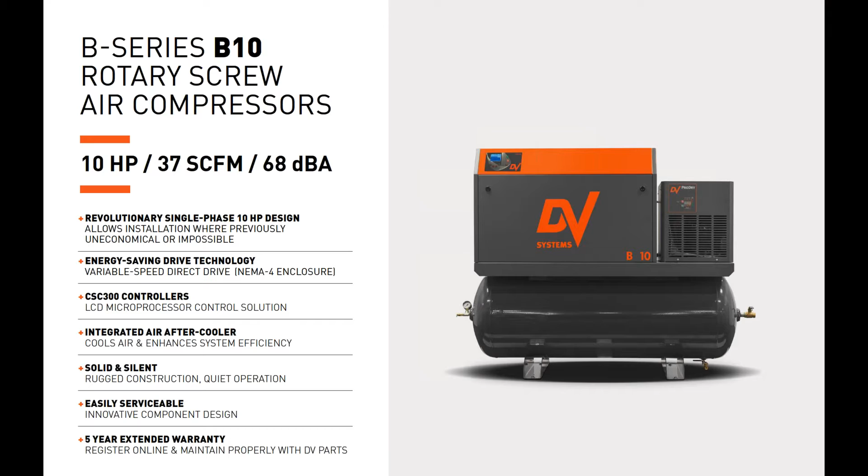So the B series B10 rotary screw air compressor, it's a 10 horsepower air compressor. It delivers 37 SCFM of air, and it does this quite quietly, clocking in at 68 decibels. Its first unique feature is its revolutionary single-phase 10 horsepower design. This allows installation in locations where it was previously uneconomical or impossible.

It also features the energy-saving variable speed direct drive technology. This comes with a NEMA 4 enclosure. It also features the CSC300 Advanced LCD Microprocessor Control solution. It features the integrated air aftercooler, which effectively cools air and enhances system efficiency. It features a solid and silent, rugged construction and quiet operation design. The B10 is easily serviceable with innovative component design.

And like all of our rotary screw air compressors, it features a 5-year extended warranty. All you have to do is register the product online within 30 days of purchase, maintain it properly according to the service manual, and use only official DV Systems parts and kits.

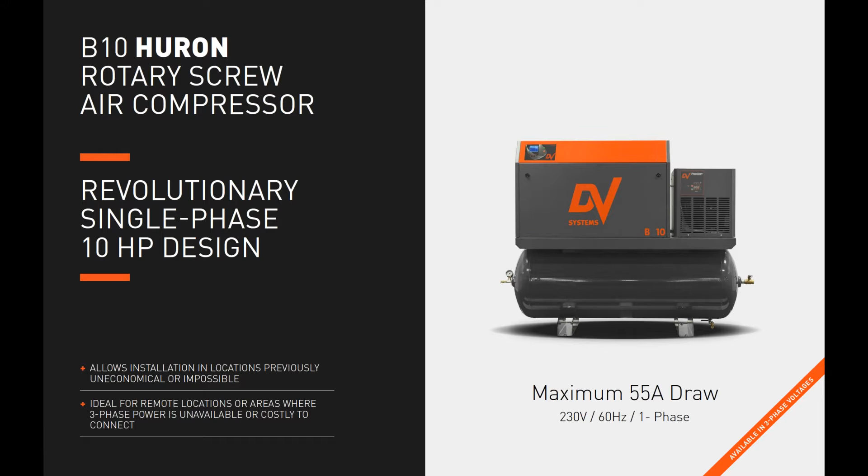So the B10 Huron Rotary Screw Air Compressor uniquely features a revolutionary single-phase 10 HP design, unprecedented in the marketplace. This allows for installation in locations where it was previously uneconomical or impossible, and is ideal for remote locations or areas where three-phase power is unavailable or costly to connect. And it features a maximum 55 amp draw on a 230 volt, 60 hertz single-phase configuration. Take note that three-phase voltages are also available for this model.

So the B series B10 Huron comes in two configurations, tank mounted and air system. The tank mounted configuration includes an 80-gallon air receiver, and the air system configuration includes an 80-gallon air receiver, an ASD40 air dryer, along with a 3-micron pre-filter.

So let's talk a little bit about the uniqueness of the air system configuration, and specifically it employs what we like to call the dry tank design. So what is the dry tank design? It's a unique compressed air system configuration developed by DV Systems. It delivers clean, dry, compressed air directly to the air receiver by employing the combination of a filter and dryer.

This configuration ensures that the tank is virtually dry, preventing the buildup of corrosion in the tank and maximizing the capacity of the tank for its intended use, to store and provide continuously cool, clean, dry air for your required applications. So to the right here, you can see that the air leaves the air compressor via an air aftercooler, which contributes to the discharge of air temperatures as low as 15 degrees above ambient, reducing energy consumed by air dryers and promoting system efficiency.

So the compressed air leaves the air compressor, it enters the 3-micron pre-filter here, and then the clean air leaves the pre-filter and goes directly into the dryer, where it is cooled and enters the tank, and it is cool, clean, dry air entering that tank, and that's what we call the dry tank design.

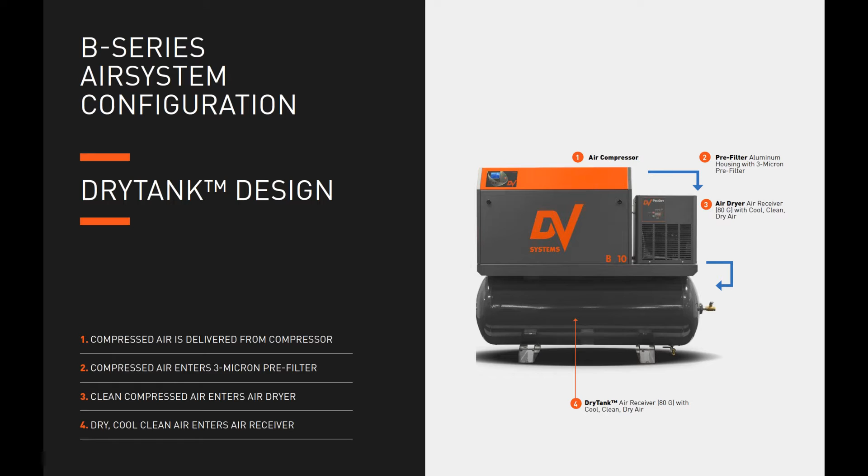So let's talk about the CSC300 controller, as it's integral to the variable speed drive option in the B series B10 Huron rotary screw air compressor. The CSC300 controller is an advanced LCD control solution. It effectively manages, monitors, and maintains optimal operational parameters to ensure stable system pressure and reliable operation.

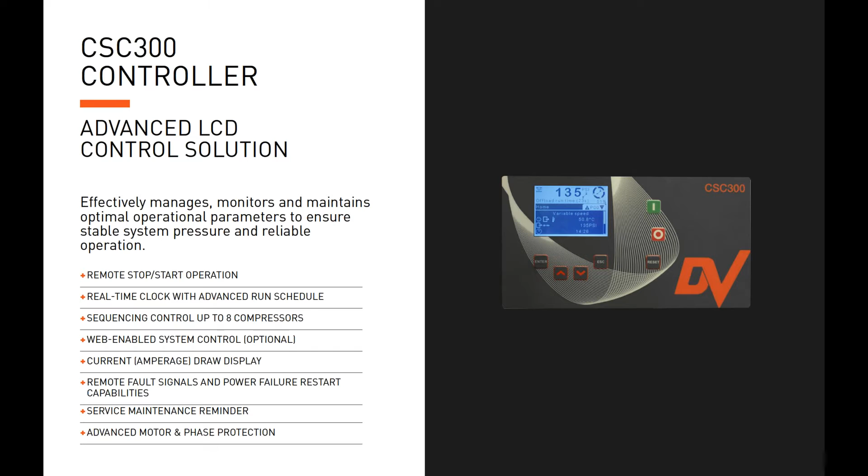Some of the features of the CSC300 controller are its remote stop-start operation, a real-time clock with an advanced run schedule, sequencing control of up to 8 compressors, web-enabled system control, a current or amperage draw display, remote fault signals and power failure restart capabilities, a service maintenance reminder, and advanced motor and phase protection.

Let's discuss the B10's variable speed drive technology. The variable speed drive technology increases energy savings by aligning energy use with air demand. How does it do this? It eliminates inrush current spikes on startup, so the motor is gradually increased on startup.

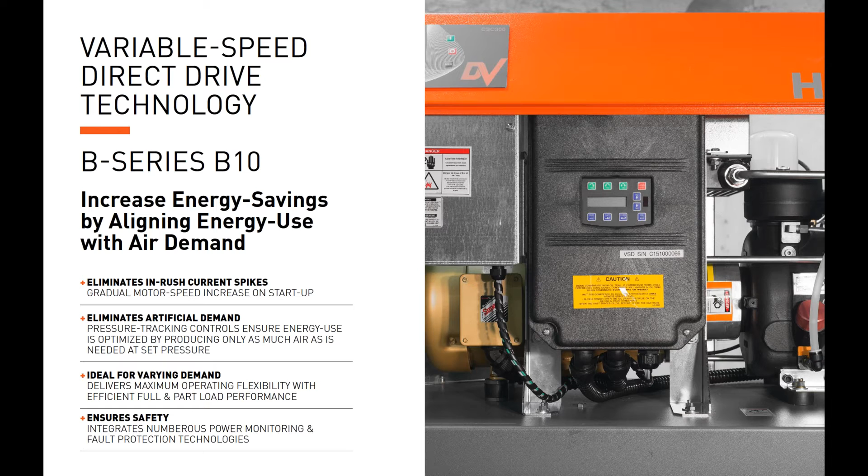It eliminates artificial demand. The VSD's pressure tracking controls ensure energy use is optimized by producing only as much air as is needed at set pressure. And this is ideal for varying demand scenarios. So it delivers maximum operating flexibility with efficient full and part load performance. The VSD also integrates numerous power monitoring and fault protection technologies, making it extremely safe.

Let's go on to discuss the B10's one-to-one direct drive technology. This further enables efficient power transmission and optimizes power consumption for the unit. The direct drive is a self-aligning drive that connects the motor directly to the high-efficiency air end with a low-maintenance coupling, and it provides maximum transmission efficiency and durability in use.

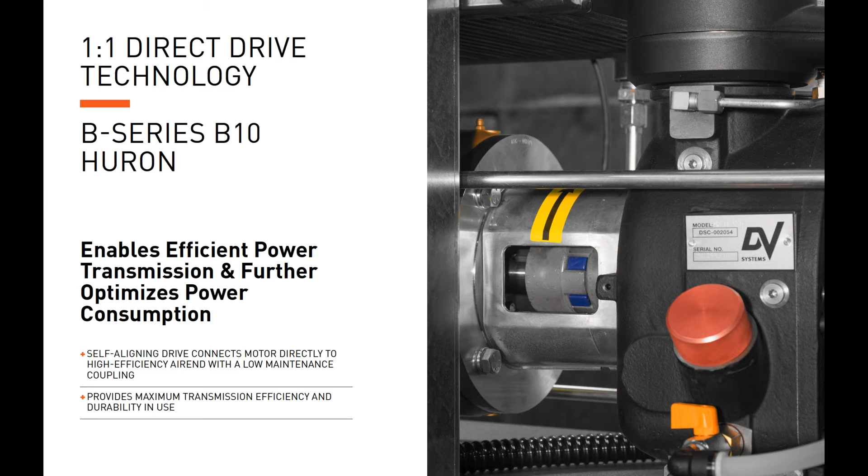Now Luke Thrush will discuss the internal components of the B-Series B10 Huron. Okay, so this is a view from the back of the compressor. The first option here is the air oil separator filter. Point 2 is the pressure transducer, which is located here. Behind the pressure transducer is the minimum pressure valve. And then here we have the safety valve.

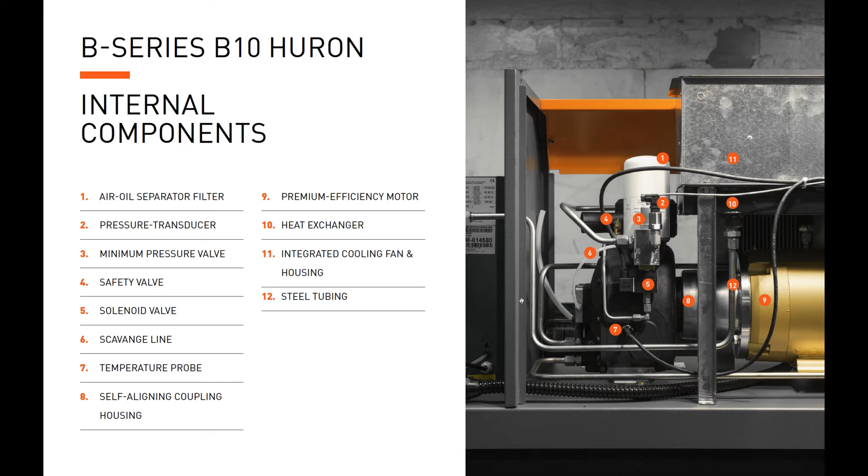Number 5 is the solenoid, which controls the intake valve. Number 6 is the scavenge line, which brings oil back into the air end from the air oil separator filter. Number 7 is the temperature sensor. Here is the motor air end coupling housing, and this is the premium efficiency motor that you can see here. This is the heat exchanger, and number 11 is the integrated cooling fan and housing. And also on the B10 we are employing the steel tube design, as you can see here.

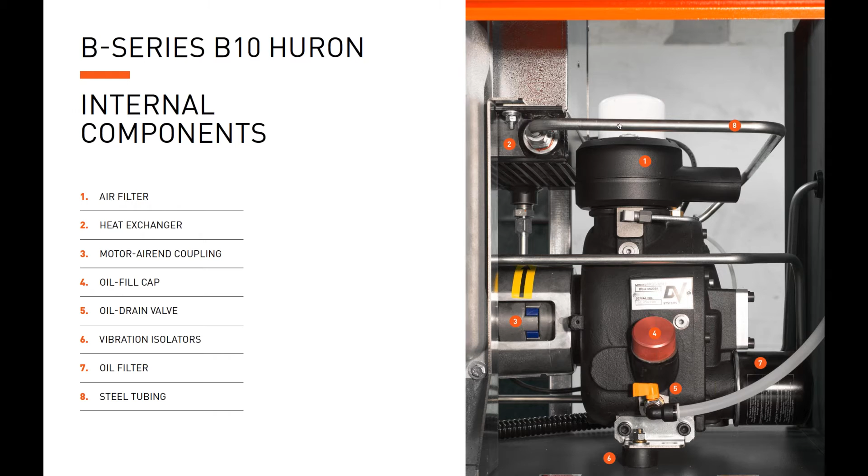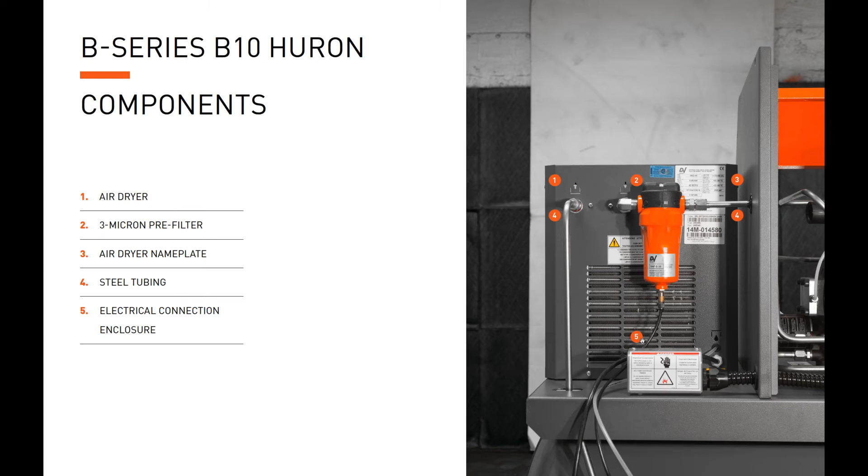Moving to the outside rear of the unit, you see the back of the air dryer and the 3-micron pre-filter here. The dryer has a nameplate where you can find dryer technical information and the serial number of the dryer. Again, the steel tubing, as you can see here. And this is our easily connected electrical enclosure. So now we move on to a video walk around.

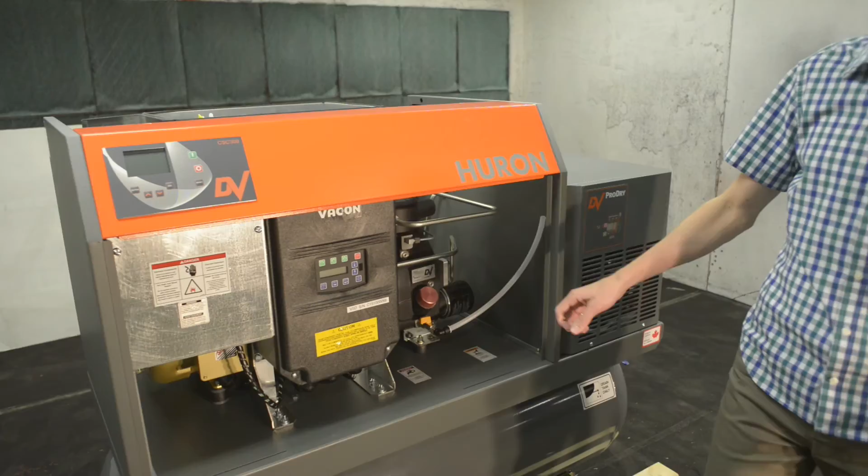Okay, so once you've removed the front panel, you can see here this is the CSC300, and you have the control panel box as well. The variable speed drive is located right here, controlling the speed of the motor. Inside you have the air filter.

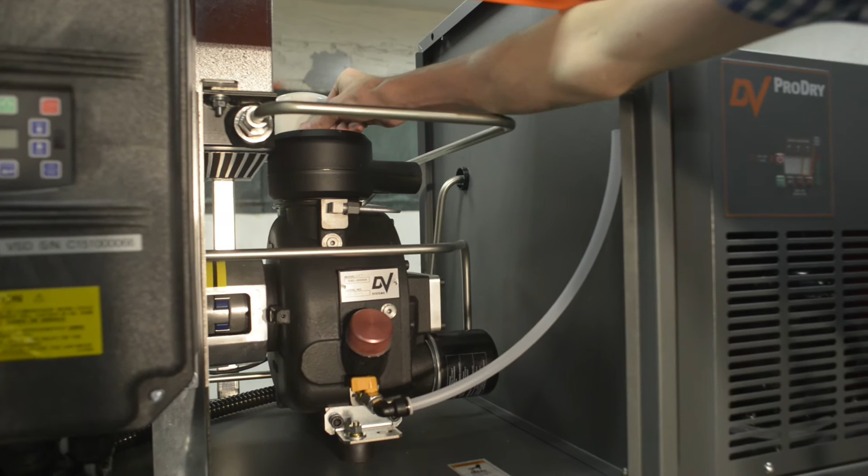This is accessible by removing the nut on top of the filter housing, and then once the nut is removed, you can lift the plastic casing off and have access to the filter. So that's easily accessible once the front panel is removed. And then again, just simply put back the nut on top to seal the housing.

Okay, in the front here we have the oil fill port. Just spin off the cap, and then the valve for the oil drain, and the oil drain tube simply comes out the front for easy draining of the oil. We have the oil filter in the front as well, and behind the air filter is the air oil separator filter, all easily accessible from the front. And this is the air end and motor coupling, which is easily accessible.

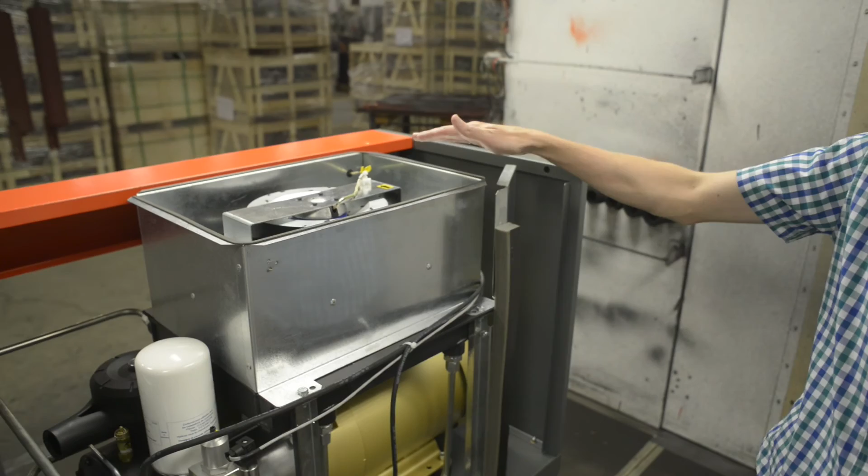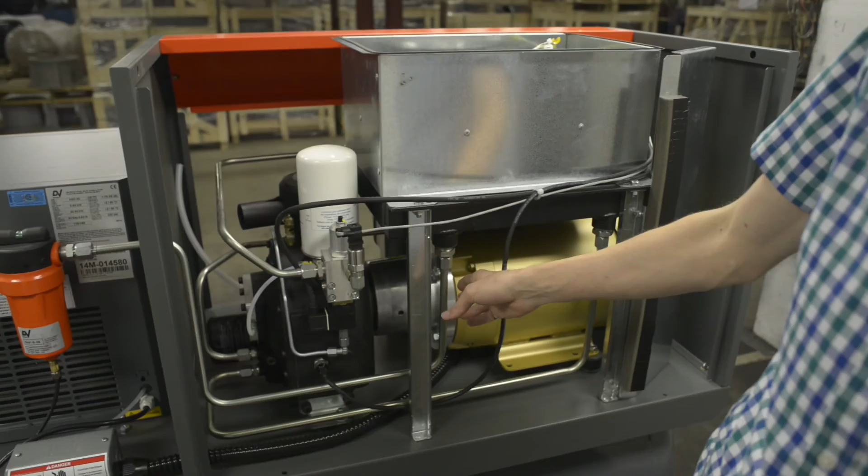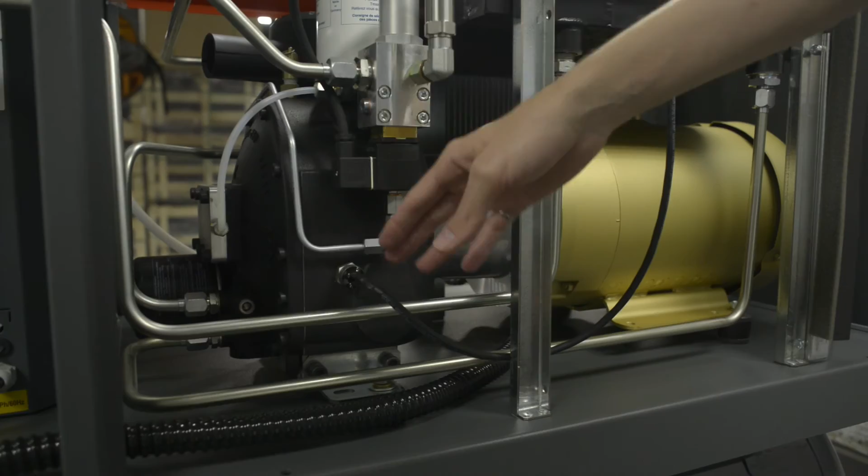So moving to the back, we have the integrated fan housing. This cools the unit. We have the premium efficiency motor, which is connected to the air end by the coupling. And we have the solenoid and the air oil separator filter on top here, minimum pressure valve, and the pressure transducer. We have the solenoid beneath that, and the temperature sensor. As you can see here, this is a scavenge line, and then the safety valve on the top of the air end.

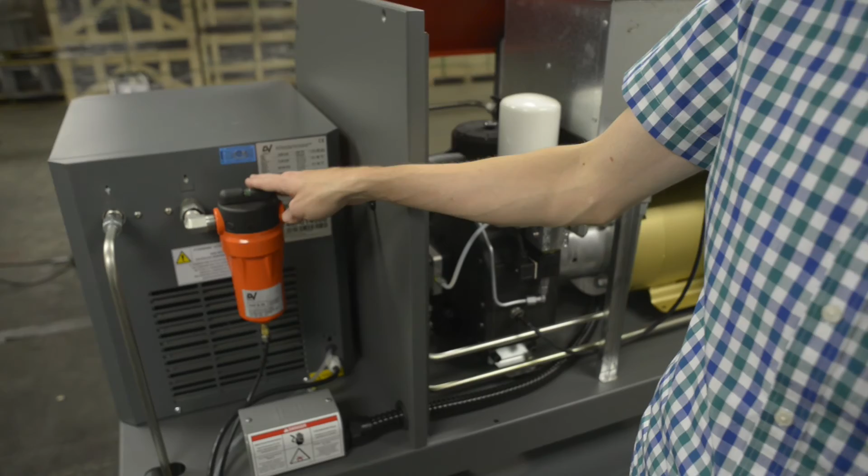Here we have the heat exchanger, which brings air out of the unit through the 3-micron pre-filter into the dryer and back down into the tank. We also see the electrical enclosure. You can simply remove the cap and then have access to your electrical connections there. The dryer has a nameplate on the back of the unit, the serial number and information, and the nameplate of the unit is also located on the side panel there.

All right, thank you, Luke, for that walk around. So let's review some of the key features of the B Series B10 Huron. It's got a revolutionary single phase 10 HP design featuring a maximum 55 amp draw. It has a variable speed direct drive technology featuring a NEMA 4 enclosure, which is dust and moisture proof. It features the CSC300 Advanced Control solution.

It also features a premium efficiency industrial TEFC motor. The B10 also features an air aftercooler and an integrated cooling fan. It has increased ruggedness with its new steel tubes. It has an integrated air end and oil reservoir, and an angled front panel improves visibility.

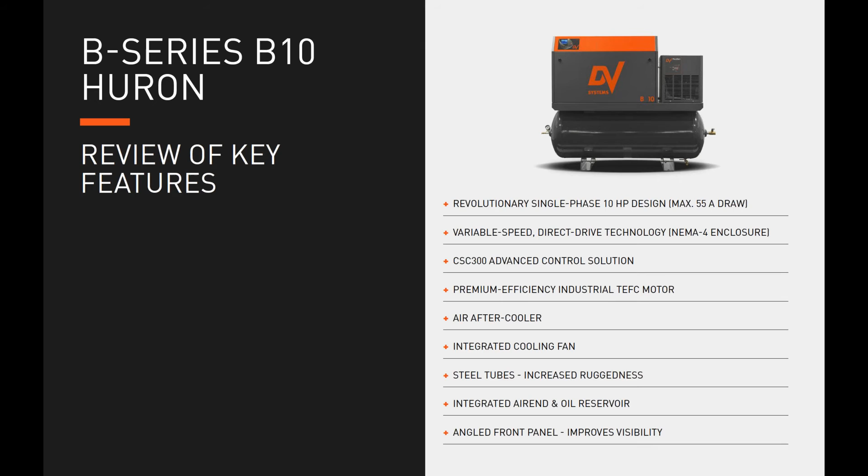So let's talk a little bit about the B10 Huron's main value proposition, its energy efficiency, specifically relating to its variable speed direct drive technology. The initial fixed cost of a rotary screw air compressor is only a fraction of its total life cycle or operating cost. The greatest proportion of costs incurred in the operation of a compressed air system are its energy costs.

Variable speed drives present a considerable opportunity to reduce the cumulative energy costs of your compressed air system by as much as 24%. So, how do variable speed drives do this? VSDs align energy use with air demand and produce only as much air as is needed at set pressure. VSDs draw power in direct proportion to the load, with energy consumption approximating 0% at no load versus 13 to 85% at full load consumption.

Secondly, VSDs eliminate inrush current spikes on startup. The motor speed is gradually increased on startup, eliminating inrush current spikes and contributing to the compressed air system's overall energy efficient operation. Thirdly, variable speed drives eliminate artificial demand by reducing system pressure.

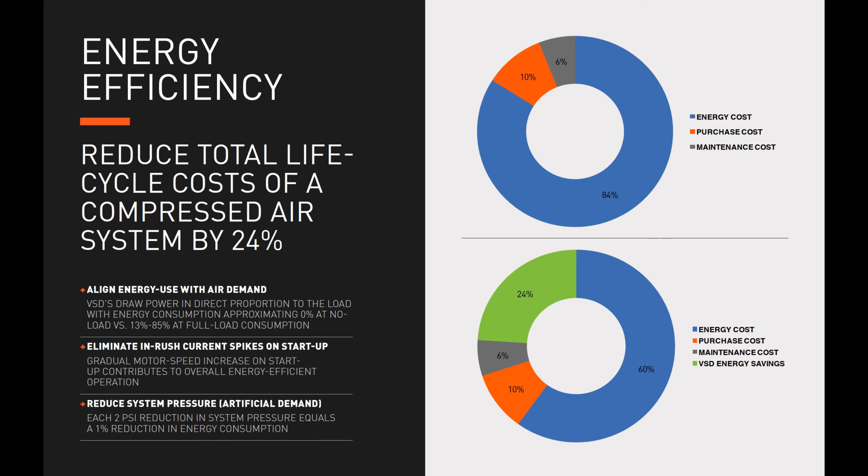Each 2 psi reduction in system pressure equals a 1% reduction in energy consumption. VSDs are typically set 20% lower in psi than traditional load-no-load air compressors. All these factors contribute to considerable energy savings.

So moving on. Let's talk about variable speed versus full voltage start drives, specifically as it relates to their starting current and energy consumption. The gray line on the graph to the right signifies a full voltage start air compressor, and you can see at the very beginning of its operation that an inrush current spike on startup is evidenced. This inrush current is typically 7 times the current displayed on the nameplate.

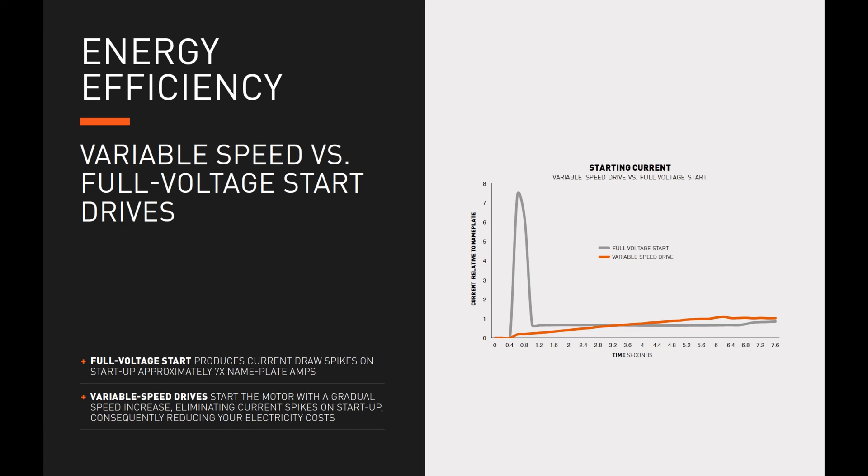Comparatively, the orange line signifies the startup current profile of a variable speed drive air compressor. And you can see that the variable speed drive starts the motor with a gradual speed increase, eliminating any inrush current spikes on startup and consequently reducing your electricity costs.

Let's move on to talk about artificial demand. So what is artificial demand? Typically, it's when an air system is overpressurized and you are producing more air at a higher pressure than you actually need to service the demands of your shop or application.

So remember, variable speed drives only produce as much air as is needed at set pressure and maintain operating pressure within 1 psi. This allows pressure to be typically set 20% lower versus load-no-load driven compressed air systems. Each 2 psi of pressure reduction equals a 1% increase in energy savings.

The graph to the right compares the pressure profile between a traditional load-no-load air compressor and a variable speed drive air compressor. The wavy or sinusoidal black line represents the pressure profile of a load-no-load air compressor over time, and the straight orange line moving across at 135 psi represents the pressure profile of a variable speed drive air compressor

over time. You can see that the load-no-load drive cuts in at 125 psi and cuts out at 145 psi, and the variable speed drive air compressor maintains a set pressure of 135 psi over time. So, the orange shaded areas signify your potential energy savings. These areas represent the overpressurization in the system, or in other words, the artificial demand.

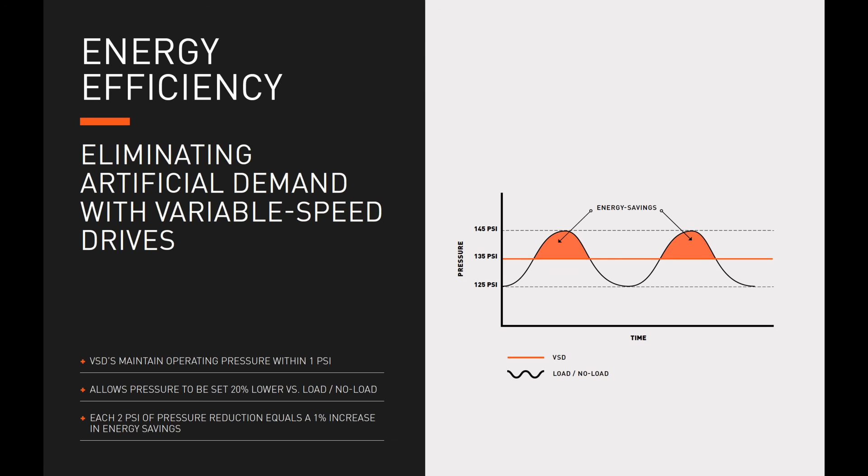So remember, variable speed drives maintain operating pressure within 1 psi and typically allow pressure to be set 20% lower than traditional load-no-load compressed air systems. If 2 psi of pressure reduction equals a 1% increase in energy savings, eliminating 20% in overpressurization results in a 10% increase in energy savings. That's considerable savings right there.

Let's discuss the available models and voltages of the B-Series rotary screw air compressor. It comes in both single-phase and three-phase options, and it comes in both configurations in these options, meaning the air system with a tank and dryer and just the tank options.

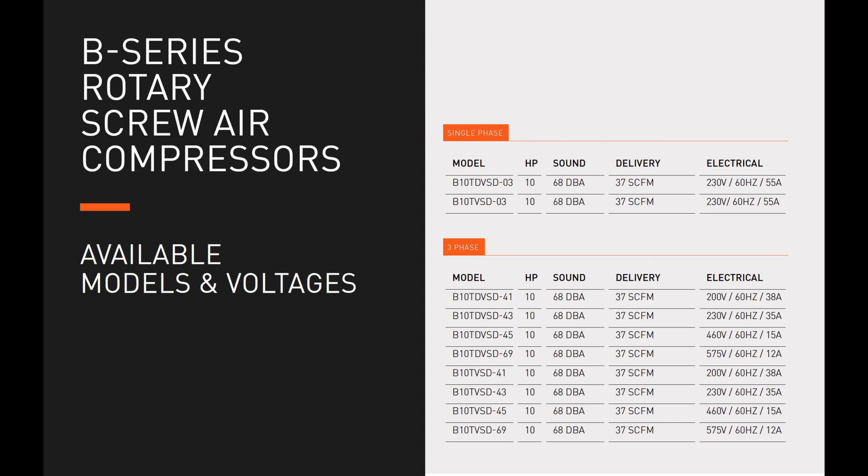Moving on. Let's recap some of our key features of the B-Series B10 Huron. It has a revolutionary single-phase 10 HP design. It's got a variable speed direct drive with a NEMA 4 enclosure. It features an advanced CSC300 Control solution, improved ruggedness and reliability due to the steel tubes, etc.

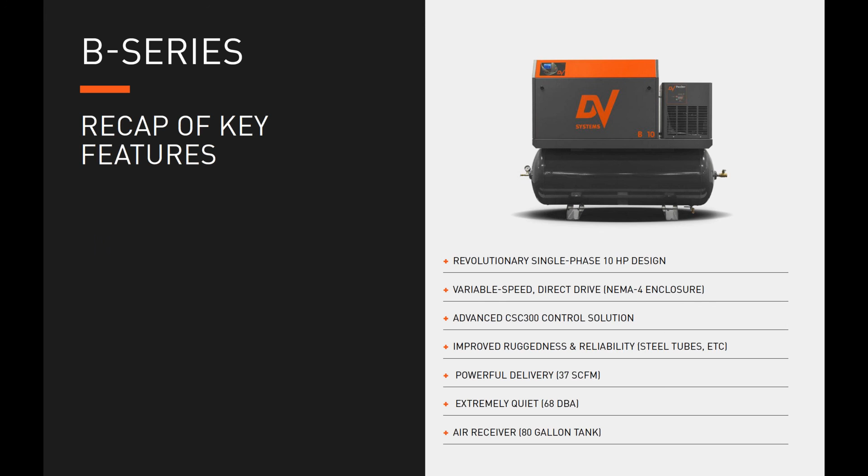It features powerful delivery at 37 SCFM, and it does this extremely quietly at 68 decibels. And it also features an 80-gallon air receiver tank.